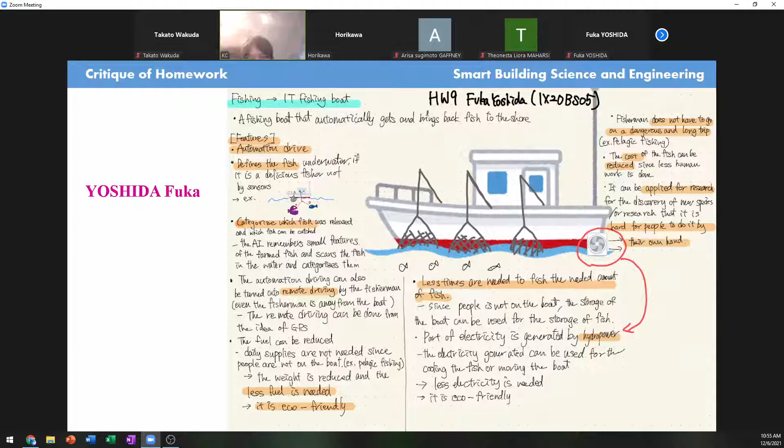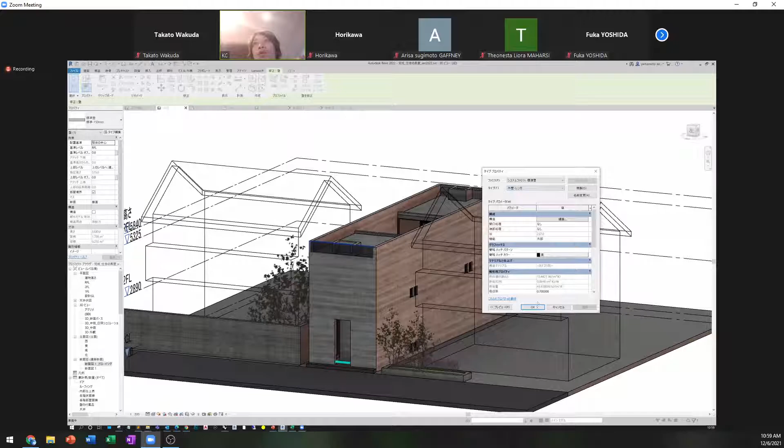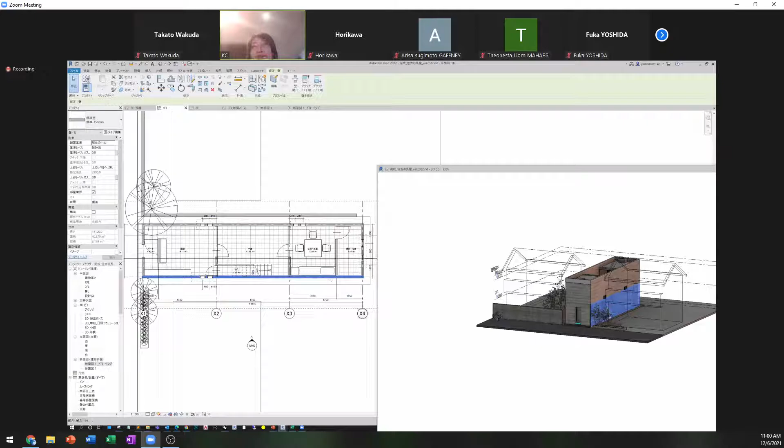So change to brick type. This model has 2D and information, so you can see it. This is the 3D model, and this is the plan drawing. Select this wall, and the models are connected, so it's selected in the elevation and 3D view too. For example, move this wall like this. Sorry, this wall is connected to the floor, so moving it is difficult.

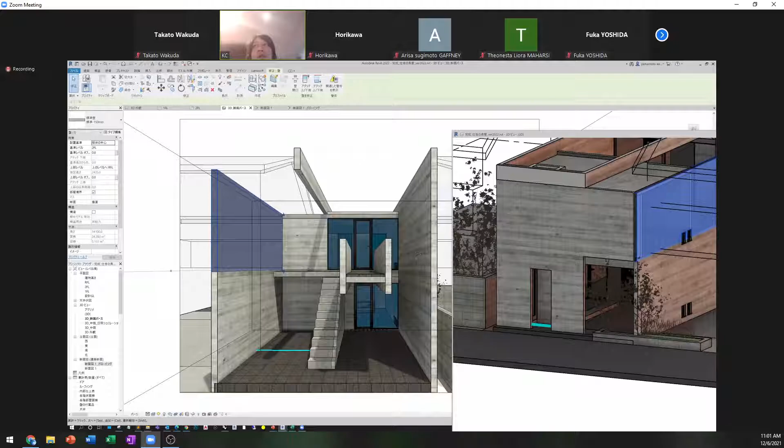So this wall is connected, and you can see many viewports connected, like this view. This wall and this wall. This is beams. You can easily see the section view. And this is the section drawing. And this is the floor and stairs. The outward is here. Okay.

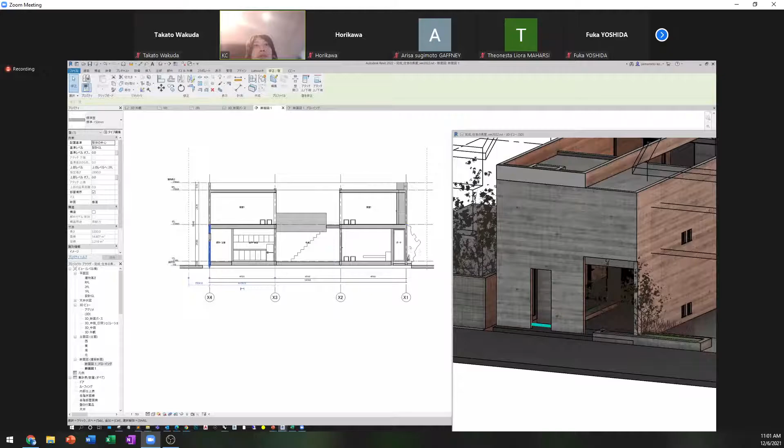And when I move this wall, okay, it moved and stays connected. So this is Revit. Today you can use this Revit model; I provide it as lecture material, so please check and download it. You can download Revit for free, so you can use Revit.

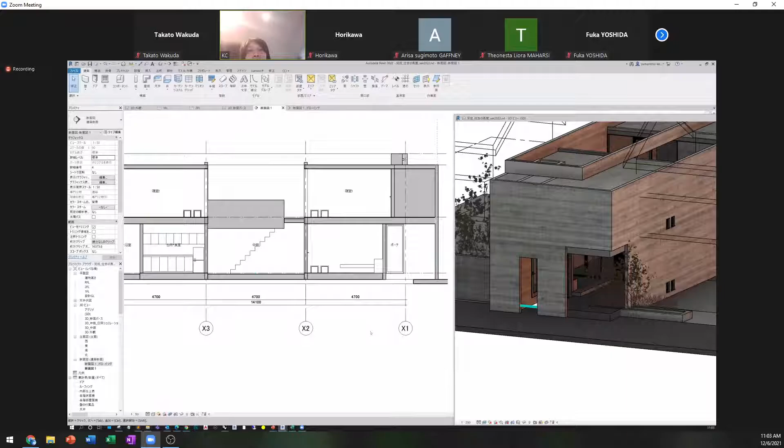The download size is large, but Revit is very useful, and you can use it for 2D CAD, 3D CAD, and as BIM software. So it's a very good opportunity to use BIM software. You can use this Sumiyoshi no Nagaya file. Please check after class. Okay. And today's main subject is GIS.

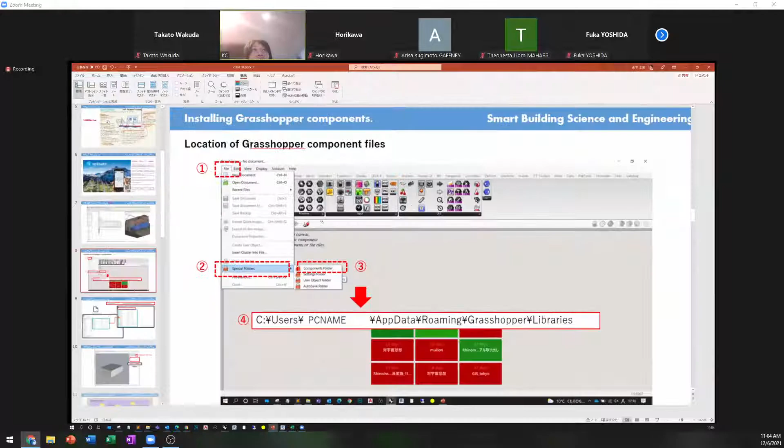Just a moment, please. Okay, today we use Rhinoceros and Grasshopper for BIM. Sorry, first, please download the component file. Let's go together. Please open a new file. New Rhino file.

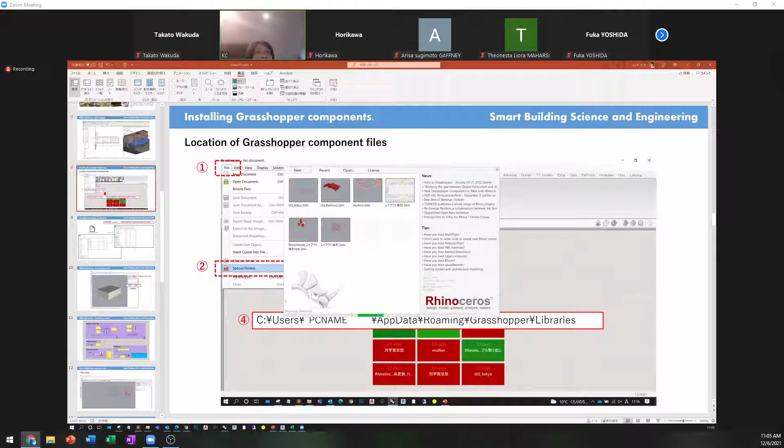Okay, and open Grasshopper. Can you download the lecture material? This link, the lecture material link below. Maybe you can see this file. This file is the data and library for class 10, and I want to install this component.

Where is the location of the component file? Please open the File tab, Special Folders, and Components Folder and click. So you can open this library folder. Okay, drag and drop these components like this and release. Maybe this component will have a large size.

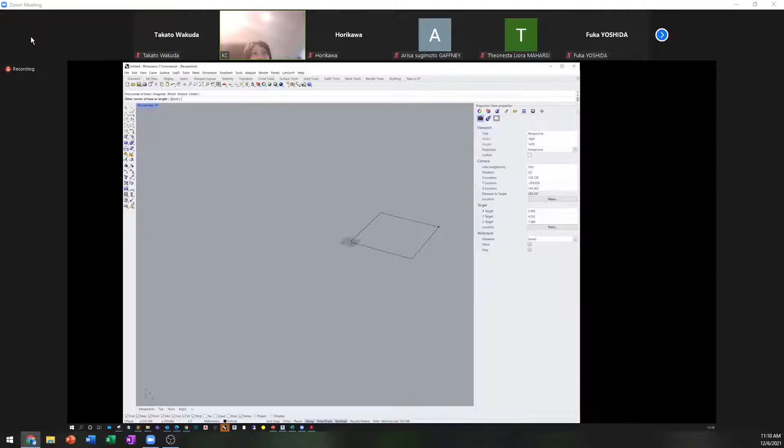Yeah, let's start today. I show you attributes today. Attribute is a very important function. This model is just a 3D model, but click this model and you can see the attribute user text here. Blue cylinder, and blank data. Now this is just a model, but here plus, for example, the key is test A and the value is test 1. So this model has this information.

For example, test B type, model type. And enter box, maybe desk. So you can enter attributes by using user text.

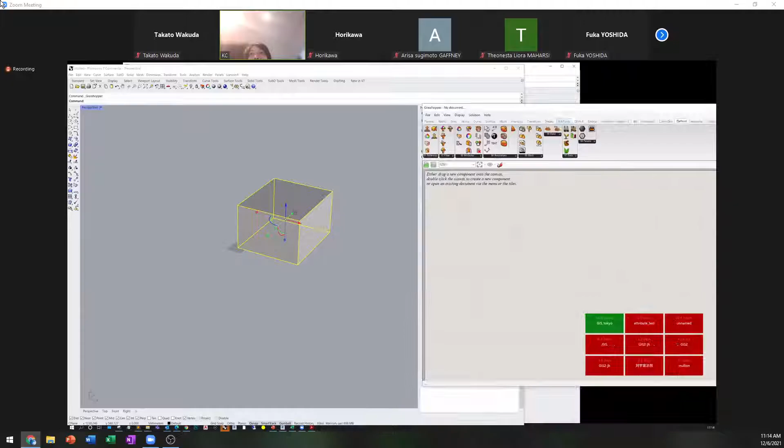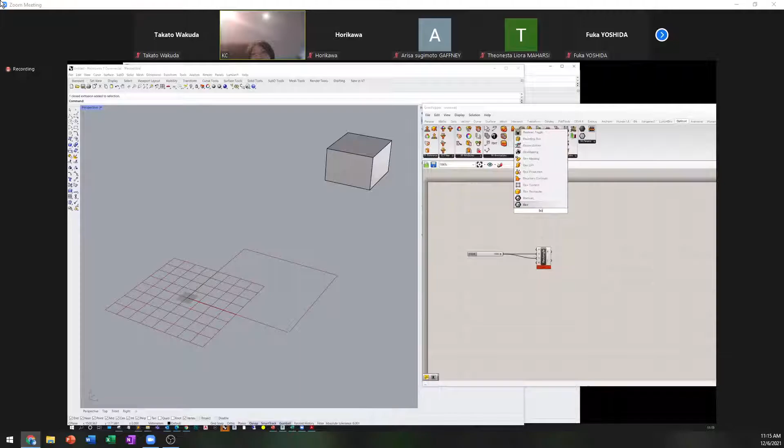Elefront and rectangle. Okay. Now we don't use this model, so move it far away. To make a rectangular box, box rectangle, connect R to R. Okay, cube. You can make a cube.

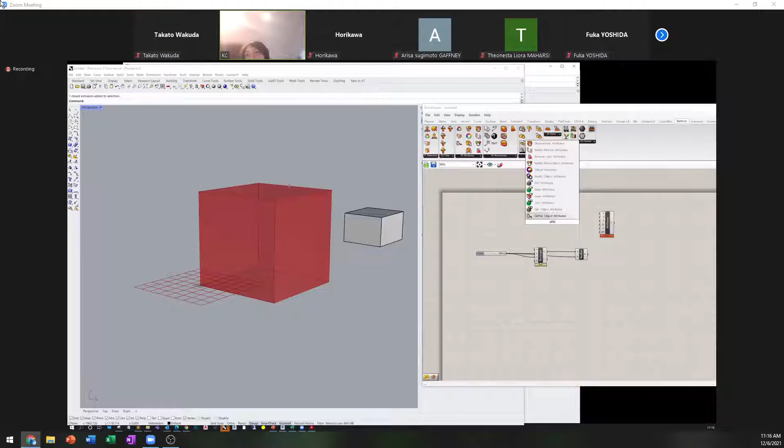And attribute, define object attribute. You can enter attributes with this component. Here is key, and this is value. So panel test A, test C, and test D. Okay. Multi-data. And test 3 and test 4. Okay.

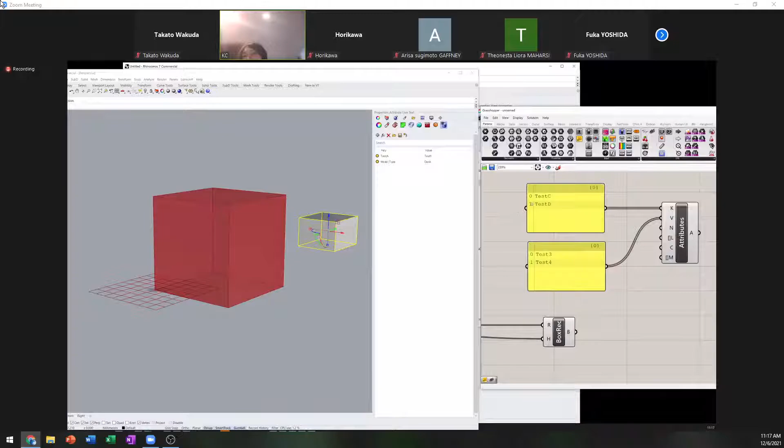Multi-data and connect to key. Key is like here, key and value. A very important thing is the index numbers are the same, 0, 1 and 0, 1. Be careful to use the same number for attributes.

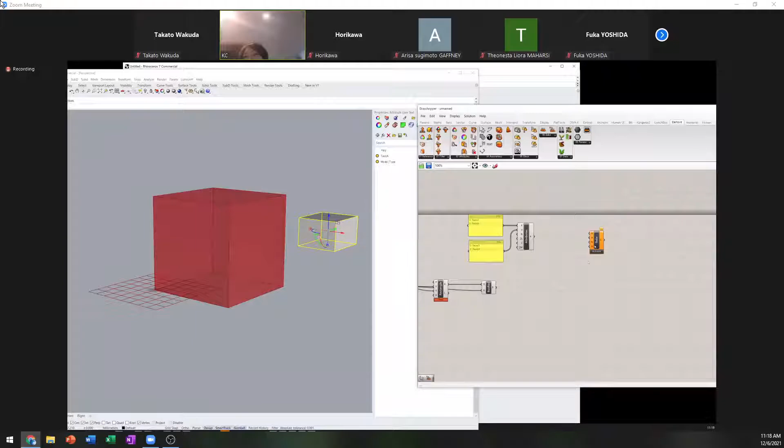Next is this component, bake object. Connect G, geometry, and attribute A. Please press this button, activate. Okay, good.

Bake this model, and this model has this information: test C, test D, test 3, test 4. So I think this is a BIM model because this model has information like this. This is very important. A lot of 3D software is not BIM because it is only a 3D model, but in Rhinoceros or Revit this model can have this information.

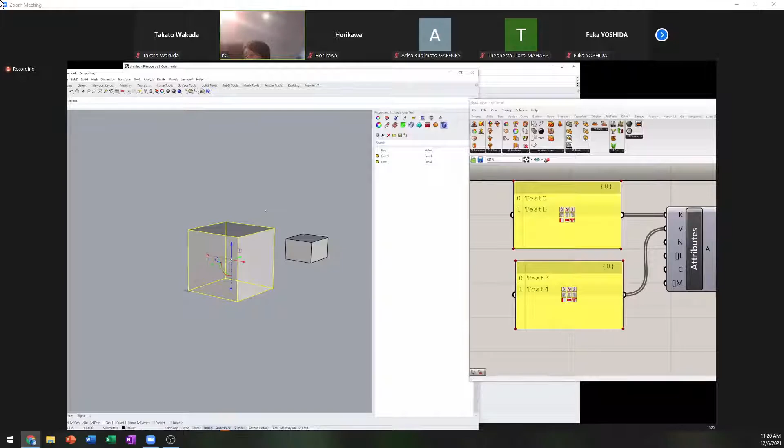So it's very important and very useful for us for analysis, simulation, or connecting to other areas of work, not only architecture but a lot of things. This is a revolution, I think, and very important. Next, this is a very simple way to use this like BIM software.

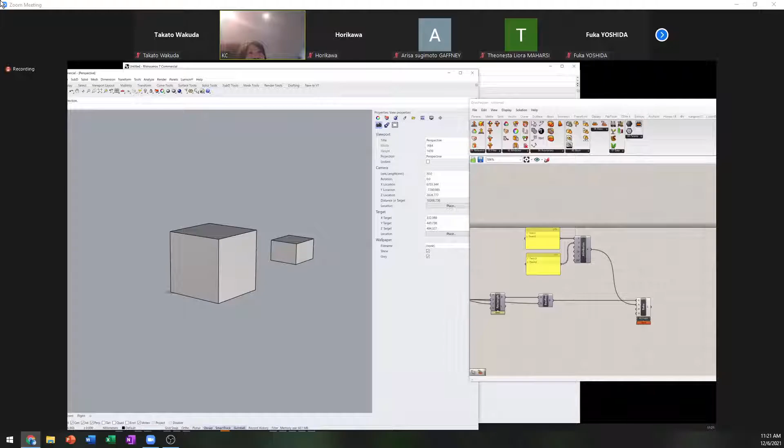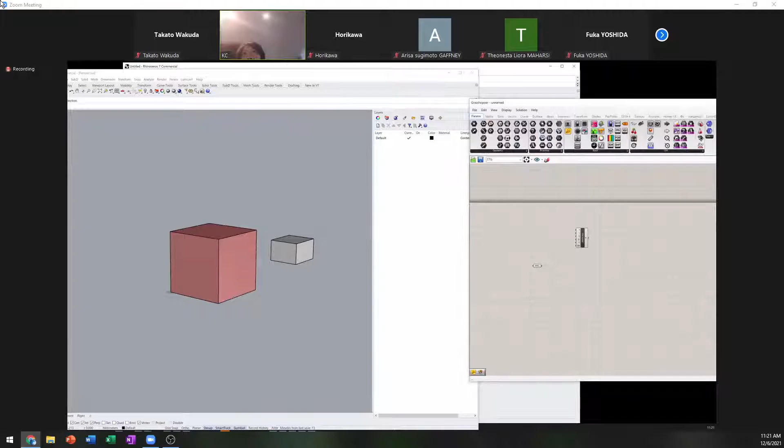Next is reference. Please set one reference. Okay. And attribute, define object attribute. Test E, Test 5. We can change this value. So let's change the attribute information.

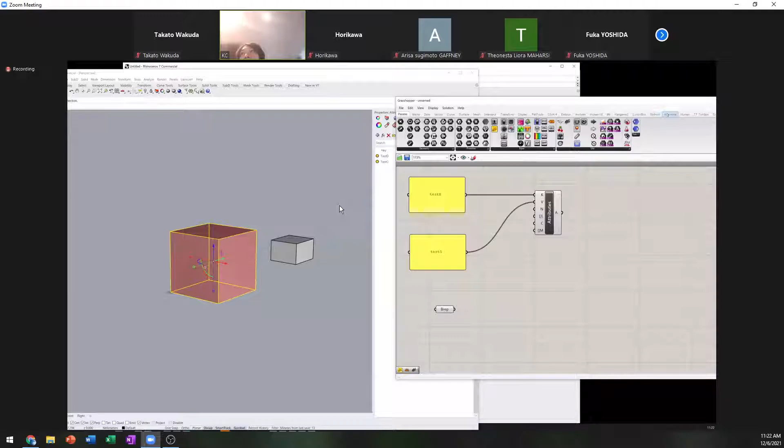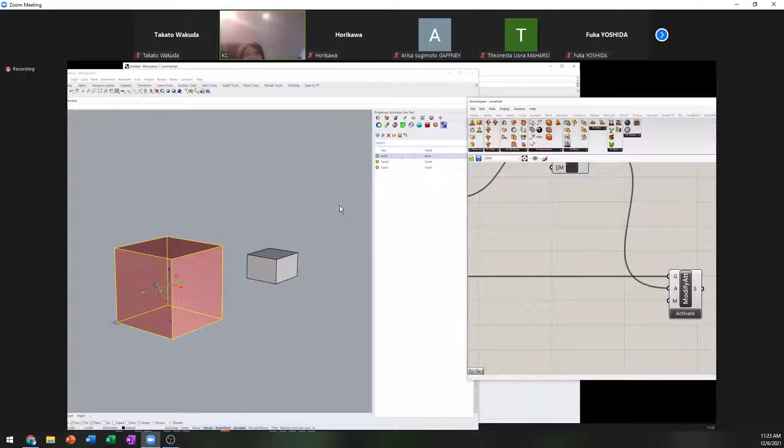The component is this one, modify Elefront. Here, this component, modify object attribute, connect G, and attribute A to A, and activate. Check user text. Okay, this key and value were added to this model.

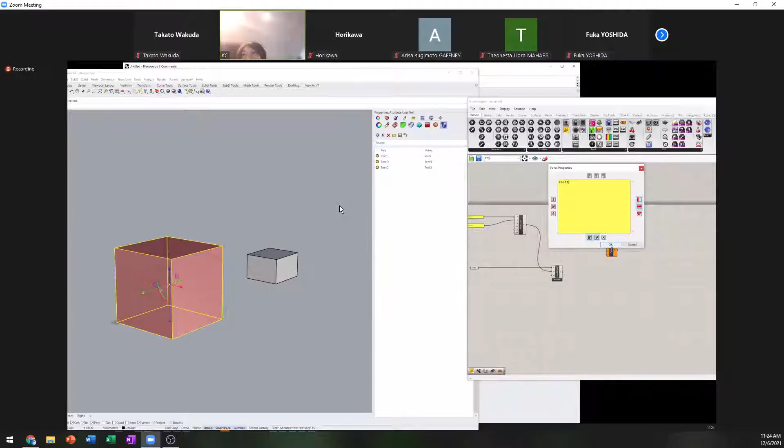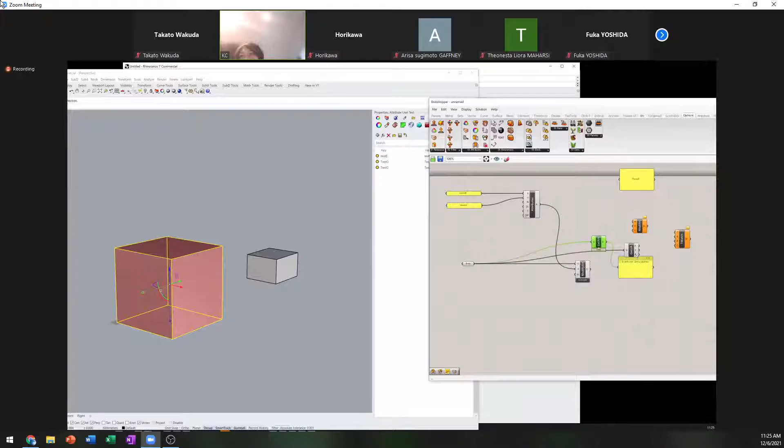So you can get attribute information, for example test E, and you can use match text. For example, display. And get Elefront attribute, connect the reference. Check this component, Elefront attribute. Key, okay.

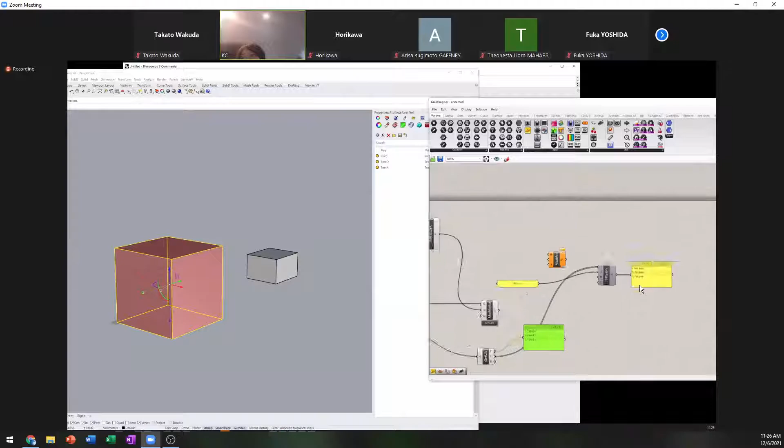This component gets key or value. This model has E, D, C. So, for example, test A: connect T and pattern test A. Check. Oh, sorry, key. Test A key. Okay, true. So this model includes test A information. True. So I can get information. Maybe it's difficult, so this is just the base idea.

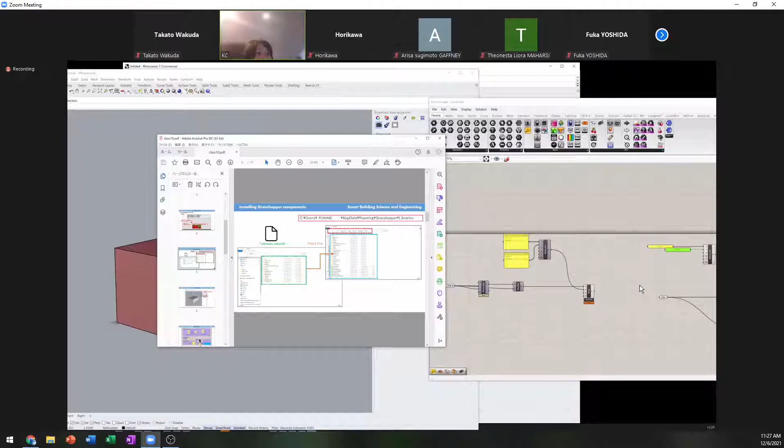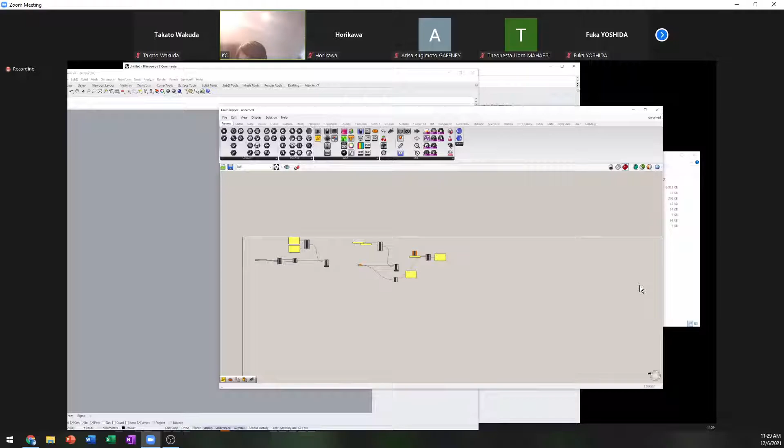Please use data as it is. We use this component, and it's very difficult, and I don't know the details of the component, but it's a very useful component.

And I introduce you GIS data, and I show you this, and, sorry, I send you a message.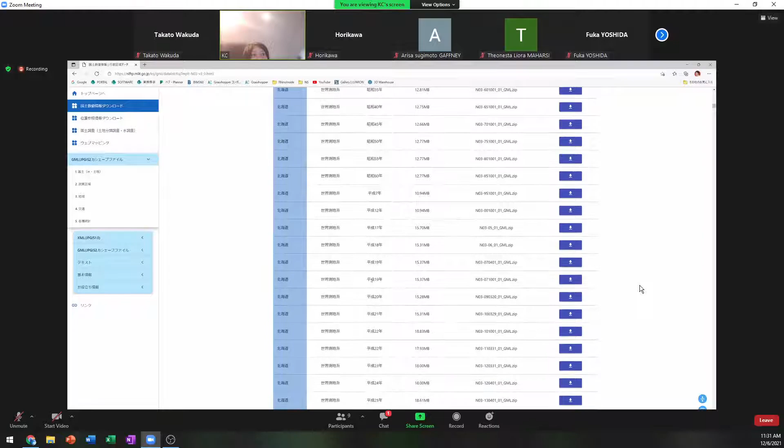This is the prefecture line, and I send you material class 11 and the GIS Tokyo folder, and please use this data. Okay. Let's start.

Call the file path component. Right click, please right click and select one existing file. And select GIS Tokyo and GIS data, and the SHP file, shape source. Please select this.

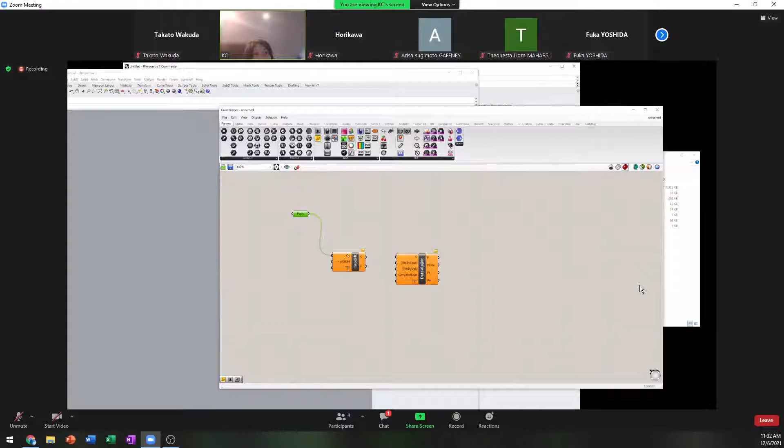And connect this and a Boolean toggle, true, here and here, and connect S to S and F to here, to get the value of the feature. Okay. SHP file.

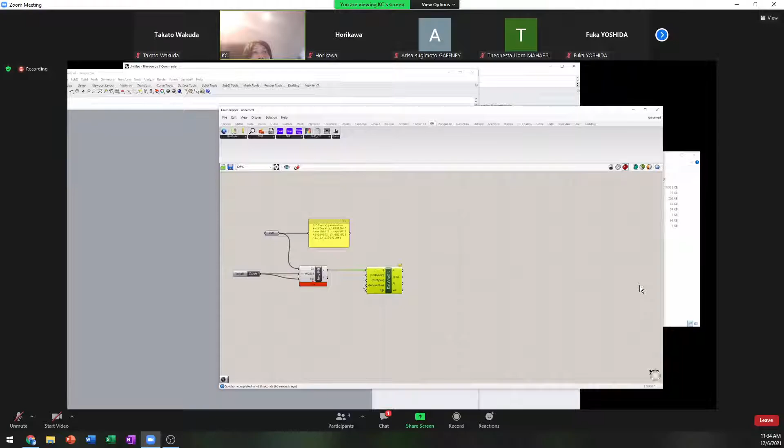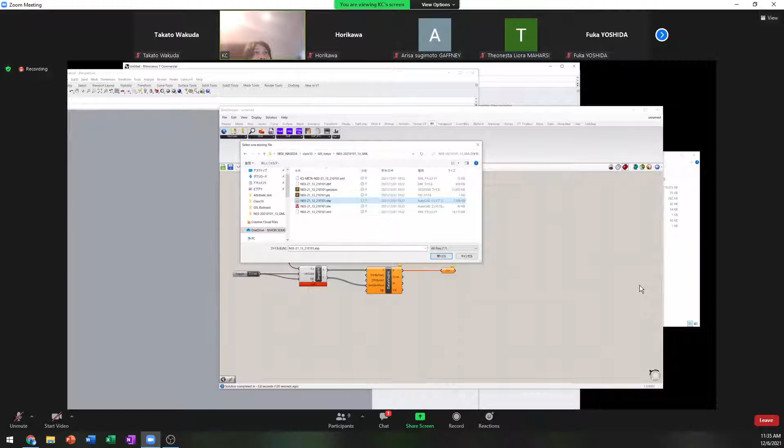Sorry, are you sure you have to input the second as a Boolean where it says WGS84? Is it Boolean? Look at the second input, which says WGS84. No, I mean the second input. Can you disconnect the second input? Yeah, disconnect the input. No, not that one. WGS84. Do you see it? Disconnect the WGS84. That one. Yeah.

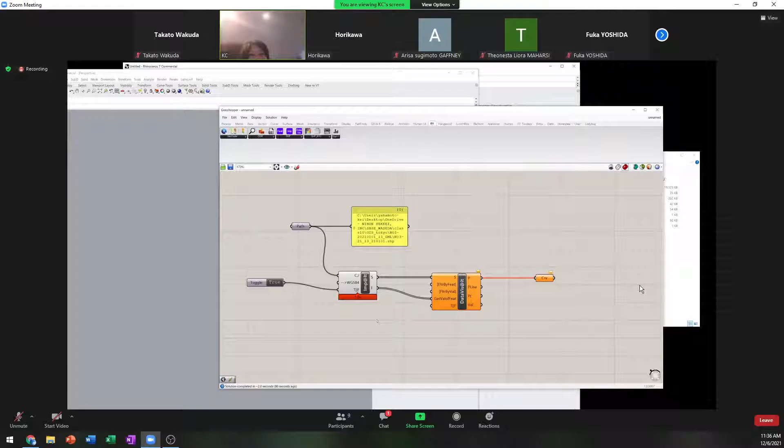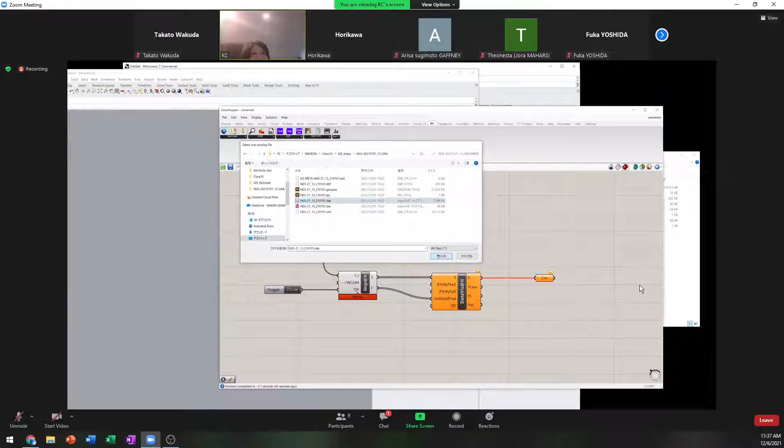Hmm. Does it give you any output? Sorry. Are you sure you're connecting to the right place for the second component, the DataViz component? Here? Are you sure you're connecting to the right position? Or you can just open up the example file that you have created and see if it's going to work. For example, yeah.

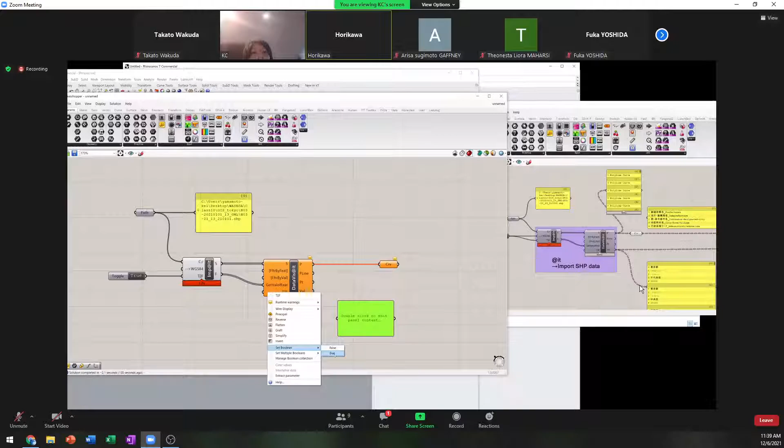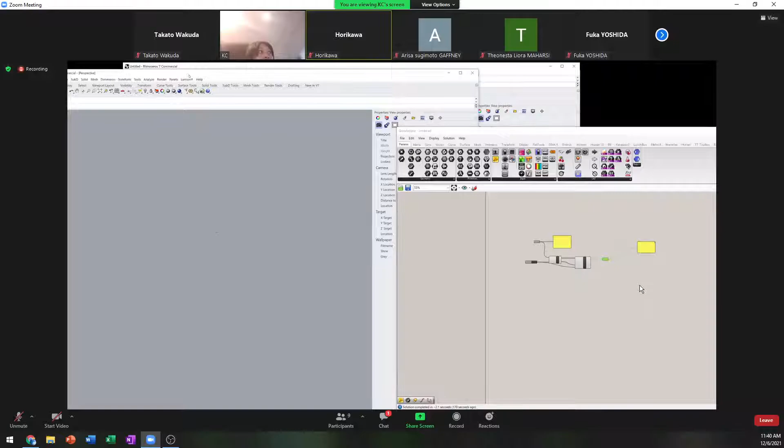What does the error say when you click the orange balloon? TF. What does TF say in the input? The left bottom input, TF. Not that one. That one. What's the default input? I think you have to input some values there. True. Oh, sorry. Thank you. Sorry for taking time. Okay. One moment, please. Sorry.

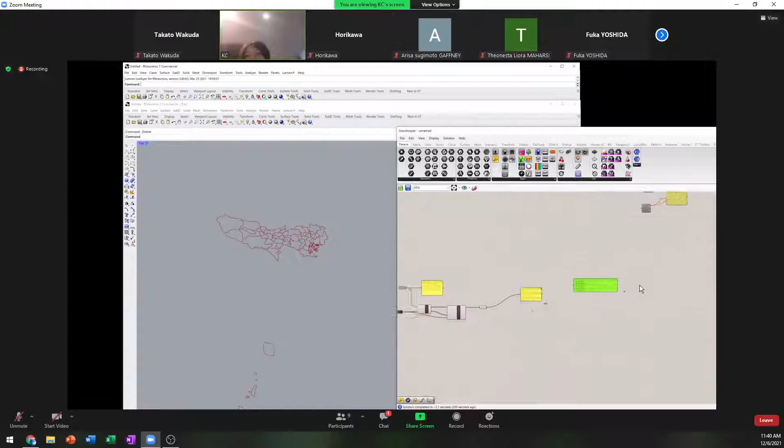And we can get the curve lines of Tokyo prefecture, like Minatoku, Chuoku and Shinjuku, Setagaya or Hachioji, like this curve. And this curve is just a model, so I have to add attribute information to this curve. So check this SHP file, so we can get the attribute value. Okay.

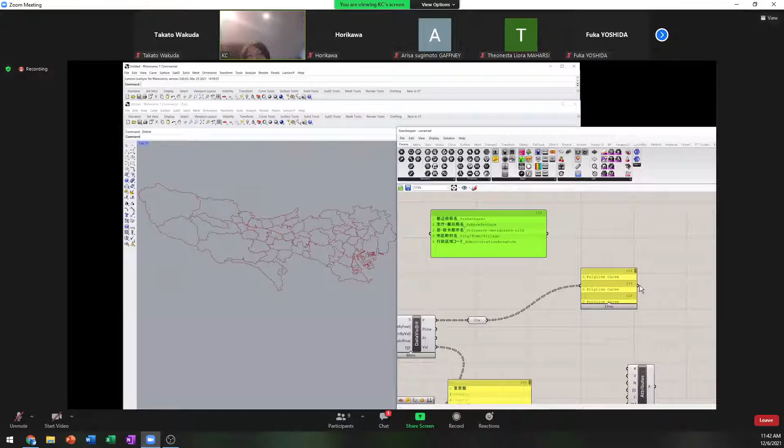Index number zero is Chiyodaku, and like this Minatoku. So define the object attribute. The key is like this. Prefect 0 is prefecture, 1 is sub-prefecture, and administrative area code. So the key is here, and the value is here. Key and value, so connect the value. Okay.

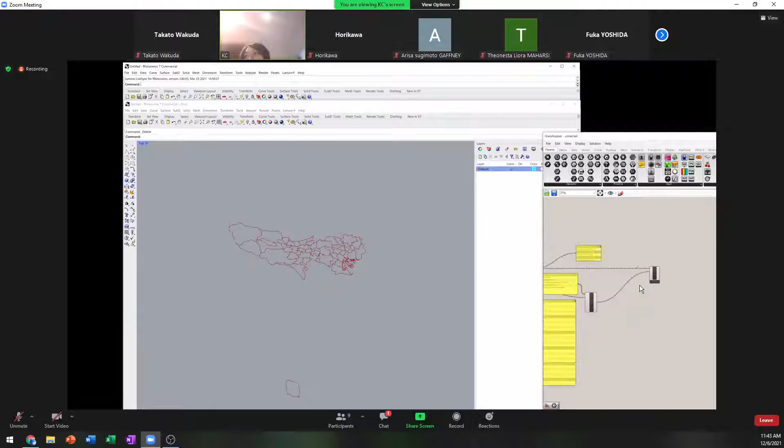And modify attribute. So the bake object component, G is geometry, and A is attribute. Okay. We change the color, and press activate. Okay. Check this curve and turn the preview off.

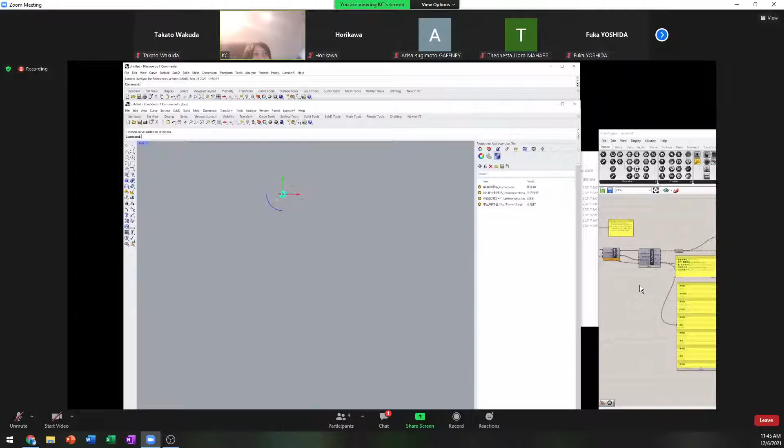Okay, and for this curve, check the attribute. Okay, Minatoku here, and Chiyodaku, and maybe this is Nakanoku, maybe Shinjuku. Okay, Shinjuku, with Waseda University here. And the islands, Hachijojima Island here, Miyakejima. Okay.

This is GIS data, and we get GIS data into the Rhinoceros model. So I think this is a BIM model with information, and very useful data. This model. Okay, and sorry for taking so much time.

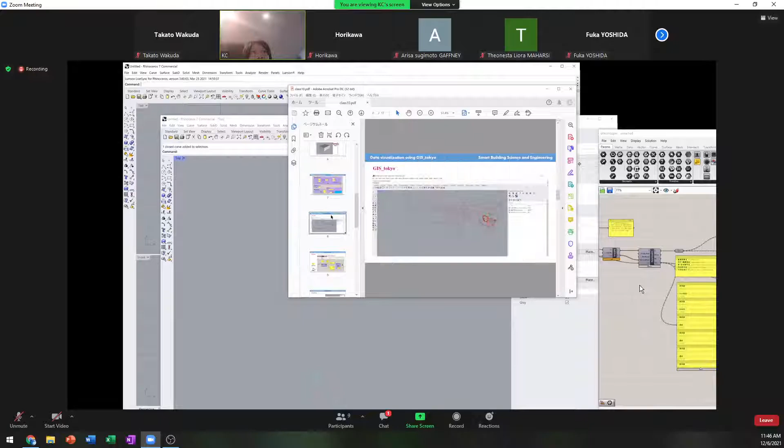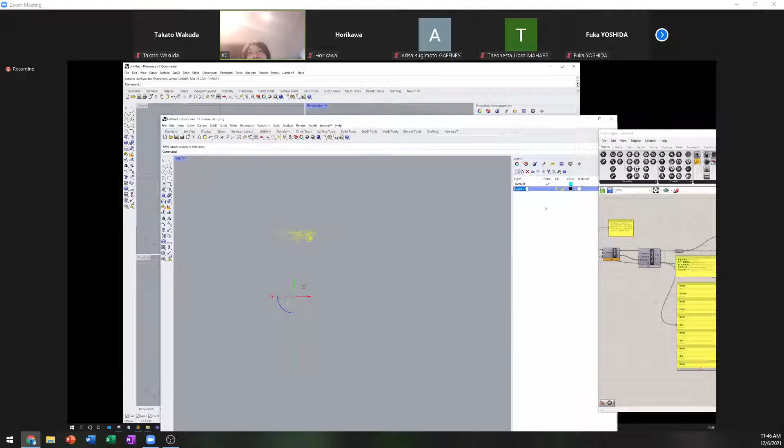Next is, I think, very fun. Next is this railroad. The first step is to draw the railroad lines in Japan and add attribute information to the drawn lines. So let's start. Okay. New layer, and this layer off. Sorry. Off.

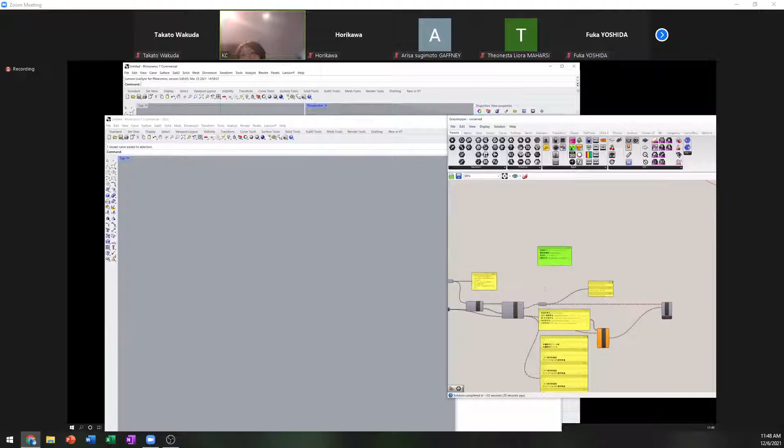And next is the GIS railroad folder, and this number 220 GML file, and select this railroad section. Okay, good. This is key. And toggle true, and connect S to S and F to get the value of the feature. And we preview. Okay.

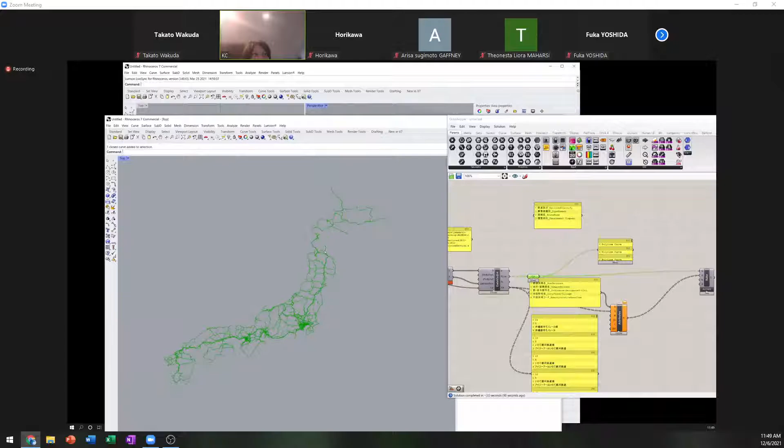If you draw only the railroad lines, a map of Japan will emerge. I was really excited the first time I looked at these curve lines, really a Japan map. But this is not a map, just rail lines. So this is the coastline, and only Hokkaido has no coastline railroad. So Honshu in Japan is this rail line.

This is Osaka, Tokyo, Nagoya, and Chiba. This is like a map. Maybe this is the Shinkansen line, Super Express. And this is Kyushu and Shikoku. Then let's check the information.

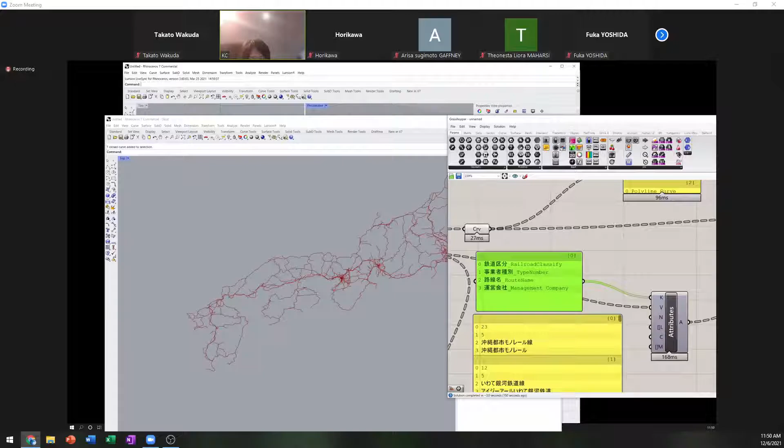So for the key we use railroad classification, type number, route name, and management company. These names are from the GIS website. There is rail traffic, and we use this rail line. And here, railroad classification here, number 1, 0, 1, type number here, route name here, and management company here.

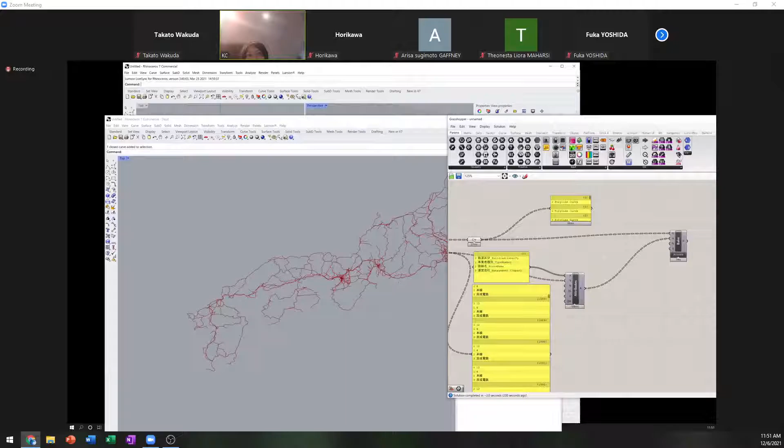So the SHP file has this attribute information. So we can get information like Okinawa Toshi Monorail and Iwate Ginga Tetsudo Line. Isumi Tetsudo is in Chiba Prefecture. So let's bake. Okay, curve. Turn to red. Magenta, accent, and bake.

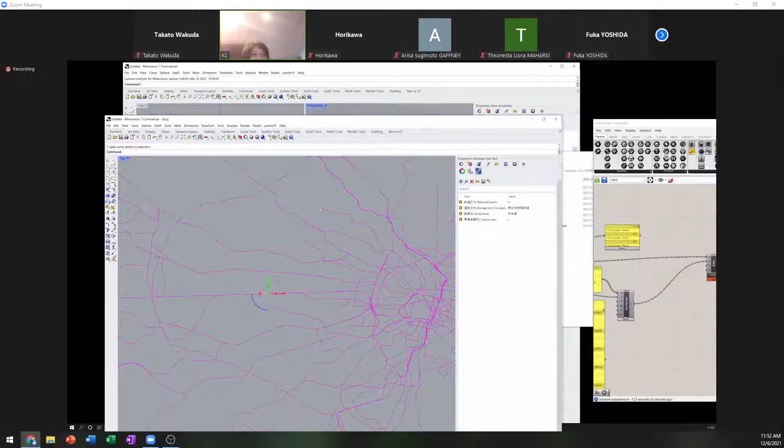Okay, check attribute information. Oh, good. This is the Chuo line, and this Chuo line is the orange train. And this line is the Chuo line, and maybe this curve is the Fukutoshin line and Nishi-Waseda campus. And this is the Yamanote line. Okay.

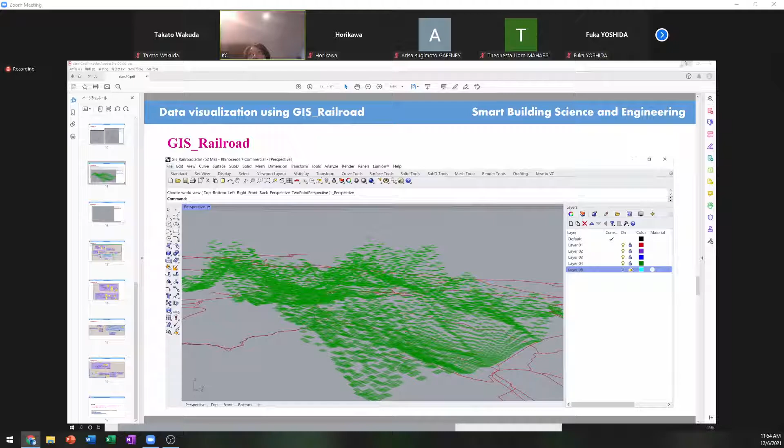Good. And next, we can get road lines and railroad lines. And next is very difficult, well not difficult, but very interesting. The second step is to lift the height of the land from the elevation data and mesh data. We use mesh data and lift. Please copy. Copy and paste. Okay.

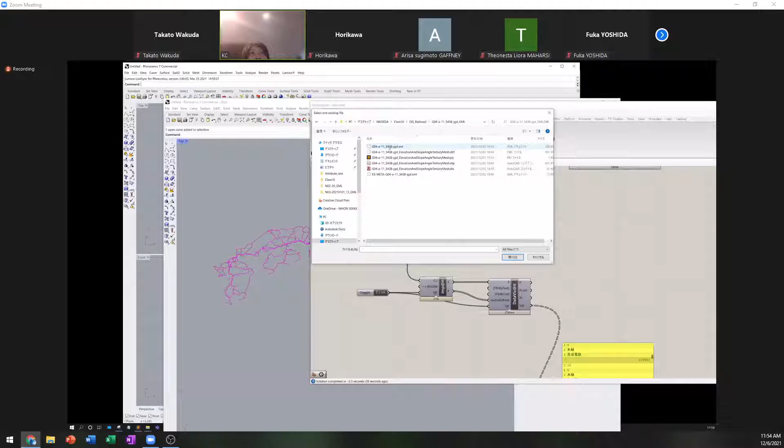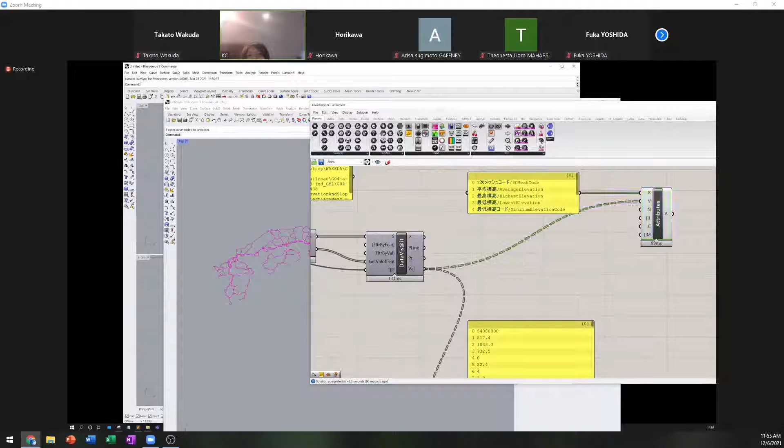And first, select existing file. GIS railroad, and here G04 and the SHP file. Okay. This is elevation data. And the key is... okay. So this is the key. Distribute the key number here and value, and we can get attribute information and get the curve lines. Okay.

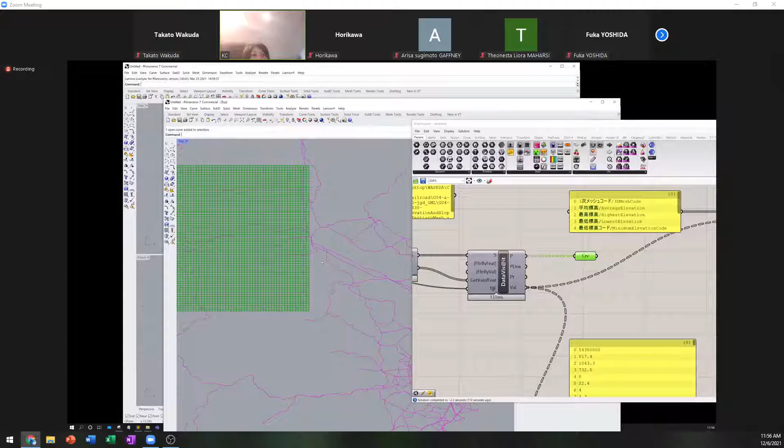This is Nagano Prefecture. Do you know Nagano Prefecture? Here are mountain areas. Maybe it takes 2 hours from Shinjuku using the Chuo Line or Shinkansen to go to Nagano Prefecture. And this is mesh data and curves, and please check the average elevation here. We use this average elevation data to lift the height, with index 1.

And so, we use this component, List Item. I want number 1. So we can get index 1. And flatten. Okay, and flatten. Same data structure, okay? 6399. 6399. Oh, good. Same number.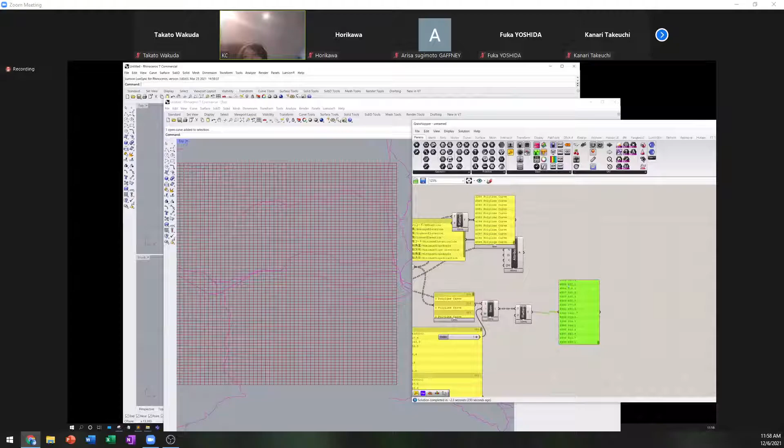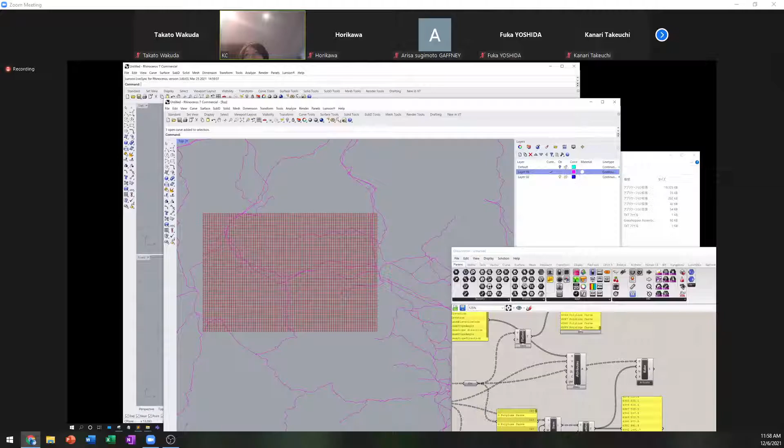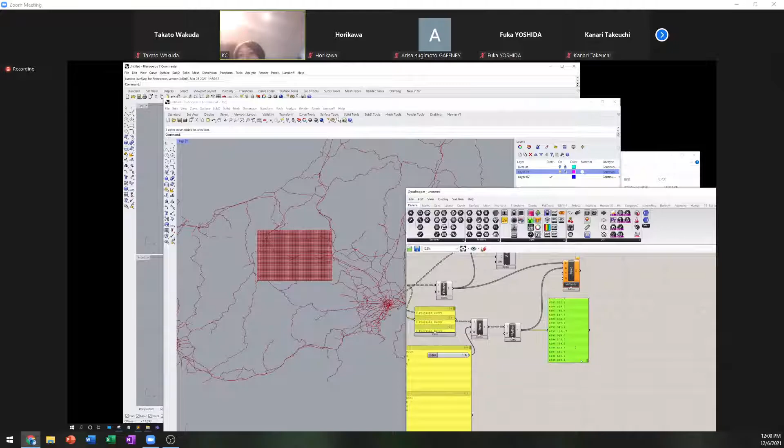So, bake object. Curve. Okay. Off. And attribute. Okay. And make a layer. And blue, change color to blue. And bake. Oh, sorry. Sorry, flatten here. Bake. Flatten. Sorry. Here. Key.

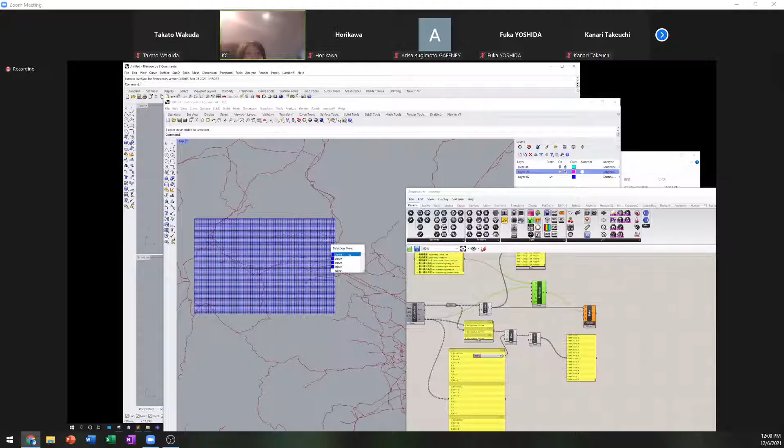Sorry, at first, an issue. Okay. Sorry. And flatten, flatten key value. Okay. This is it. Okay.

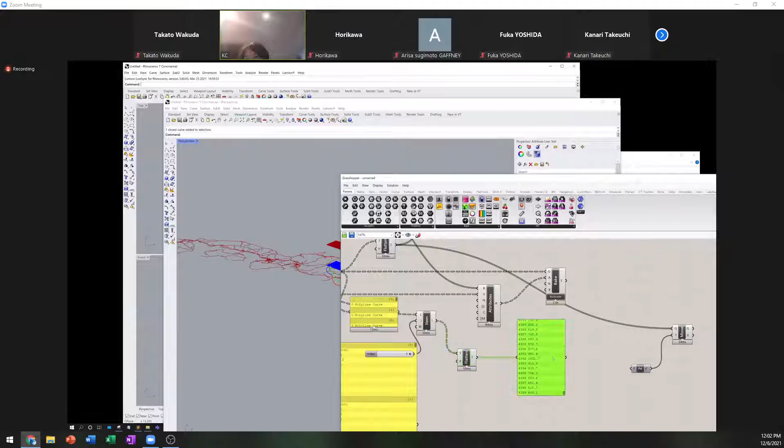These mesh curves have this information. So next, I'd like to lift this curve using the average elevation. Move geometry and Unit Z. Sorry. Unit Z uses this number. So connect. And this scale is a very huge size, and the GIS model is very small. So we use division.

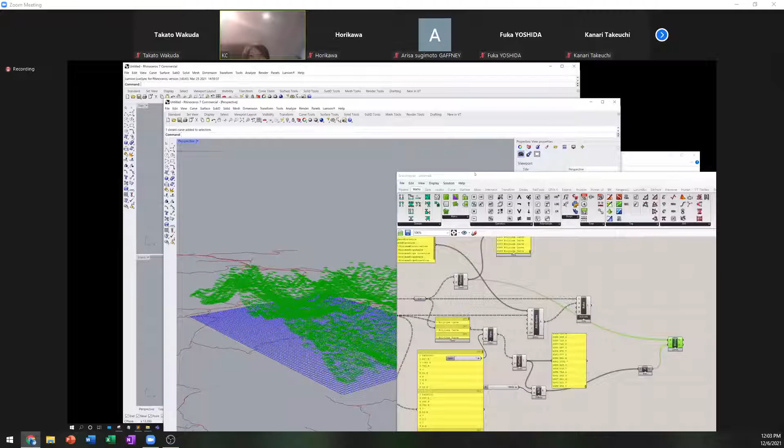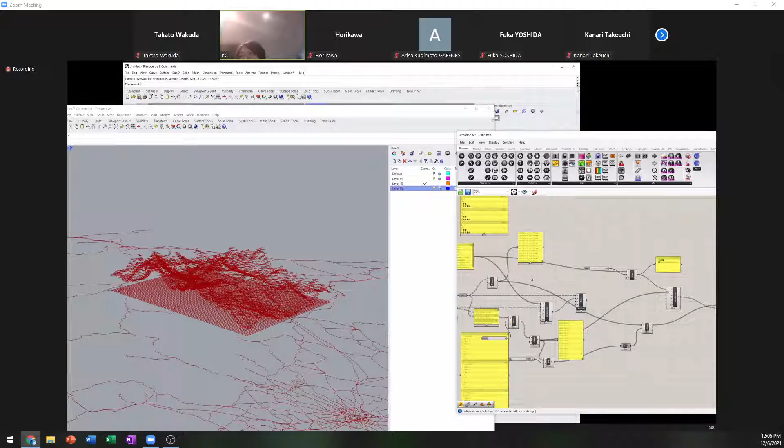Okay. I want to get this drawing, add a layer, range, and bake object, attribute, list item one, and flatten. Okay, and value attribute, correct. Okay.

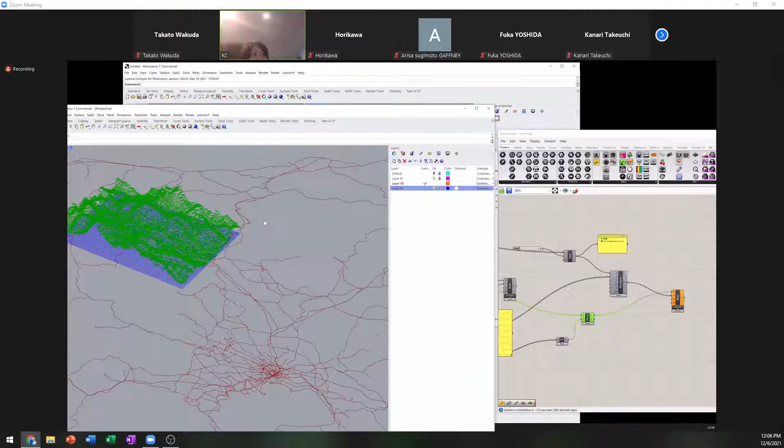Nagano Prefecture has a lot of mountains, so this curve is like a mountain. Okay, this is a valley, so this line is the valley area, and this, I think, is the top of a mountain.

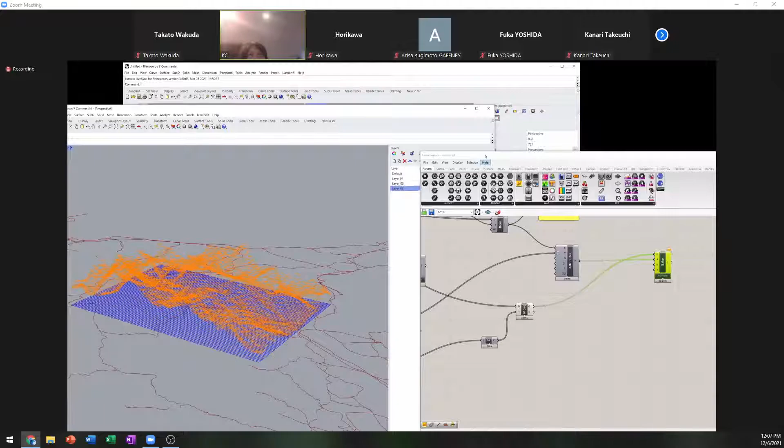Okay, sorry for my explanation. It is very difficult to use this component. Please be careful to connect the Boolean through here. Then right click on path and select existing file. Okay, and attribute bake. So you can make and view the GIS model and draw with Rhinoceros and Grasshopper. So check this model, okay?

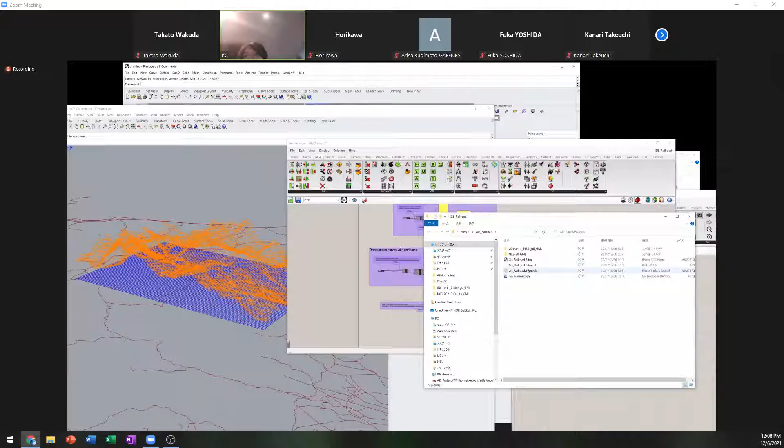And elevation height, average elevation, 1870. And here, oh no. Sorry. I'll show you the proper data; I already sent it to you. Please check after this class the Railroad 3DM data and the GIS Railroad data. This is the proper data. So please check after this class. Sorry.

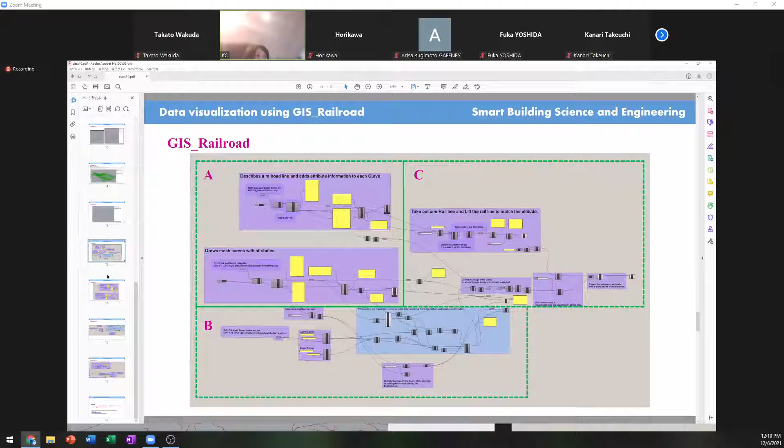And today, you can get this graphical data. And next, I have no time to explain, so please check the GIS Railroad data. It lifts the railroad line to the height of the land, a railroad along the elevation. Please check after; this is a component explanation. GIS Railroad. A: describe a railroad line, add attribute information to each curve, and draw mesh curves with attributes. And B and C, please check after class. Sorry, I can't explain it all.

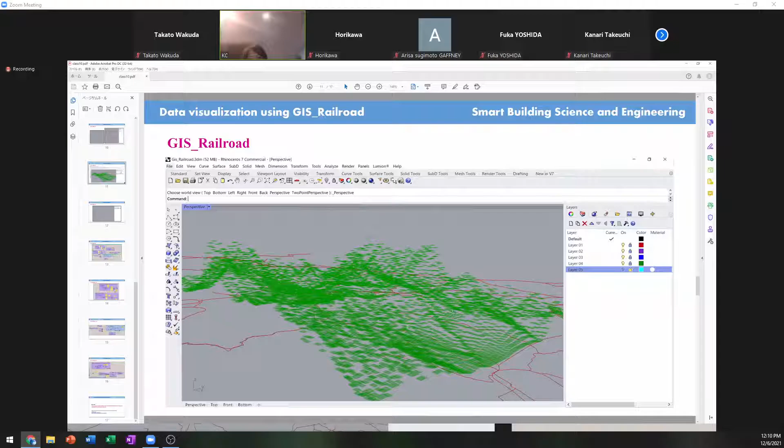And homework. This week's homework is: please import publicly available data such as GIS into Rhinoceros, and create new visual data by crossing data with data. Like this, elevation data and rail data, lifting the rail data to the height of the land elevation, like this. Very simple is good and okay. Just crossing data with data.

The important thing is to import publicly available data such as GIS data into Rhinoceros. Maybe it's difficult, but very fun, because we use public data and customize it. We can customize such data to visualize it. This skill is very important for us. So please try this homework. Sorry, do you have a question? Okay, sorry for the overtime.

After, please check the lecture material here. Sorry. This data is in here. So check GIS Railroad and GIS Tokyo and the component library. And this is today's class information explanation. So check this PDF file and the Revit data and simulation. If you have time, download Revit and use this file.